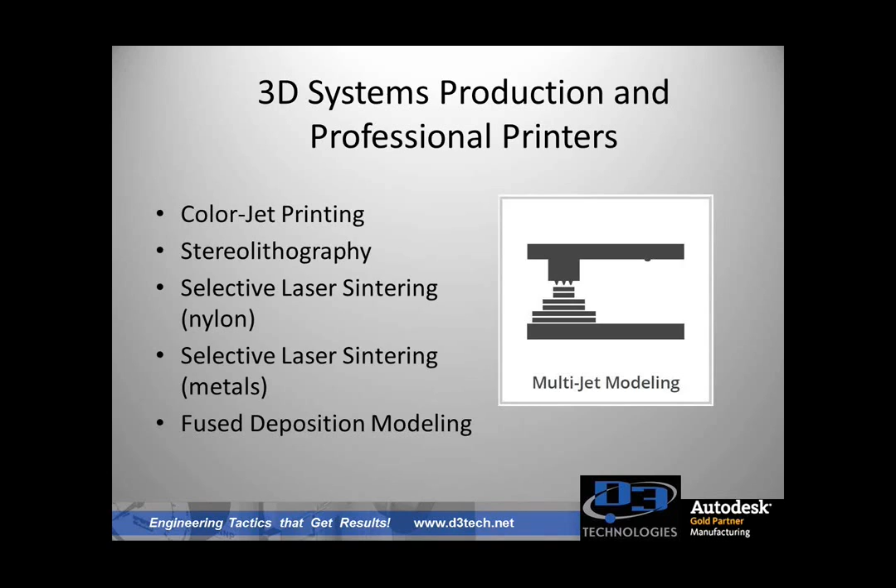We're going to discuss just one of the 3D print technologies from 3D Systems, which is multi-jet printing, and talk about some applications right for this technology. It's our intent to have these on a regular basis, so stay tuned for the next webinar where we'll be discussing stereolithography. As I mentioned, 3D Systems offers 7 different technologies for 3D printing, everything from color jet printing to selective laser sintering of metals and plastics. But today we're going to focus on multi-jet printing. I want to start by showing you a video of exactly how multi-jet printing works, and then we'll go into more details shortly.

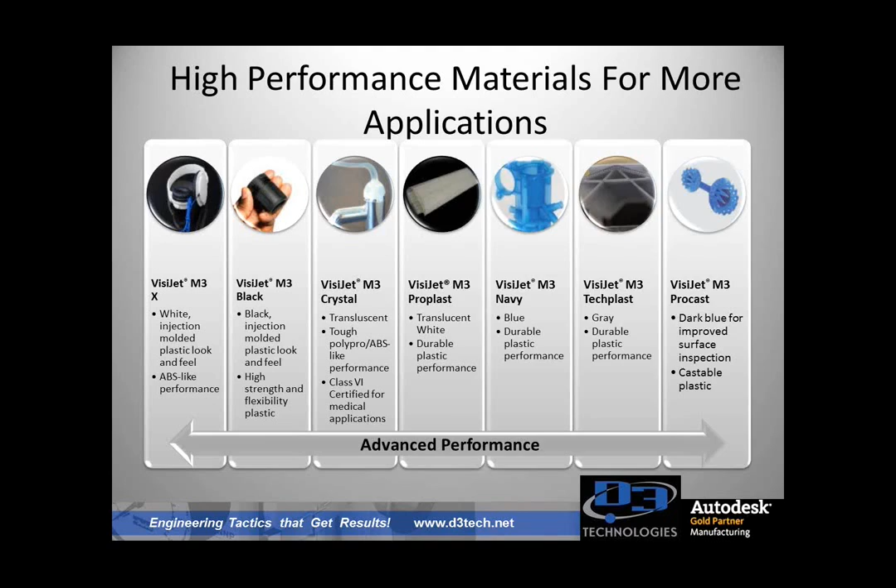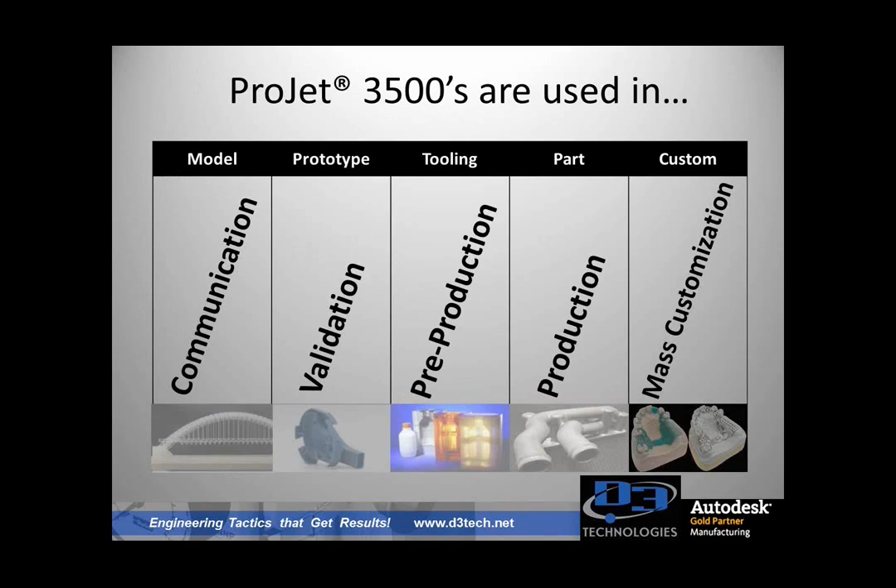As you might suspect, there are thousands of applications being used out there today in printing, but we can really condense it down to a few categories listed here. I want to talk about just a few examples of how the ProJet 3500 technology can be used in some of these options that are listed. So let's talk first about functional prototypes.

With the ProJet 3500, we can create functional prototypes. When I say that, I'm talking about testing form, testing fit, maybe assembly — you can get some great hands-on feedback, and do some great water testing. Why? Because this acrylate material is actually watertight and airtight, so it's not going to swell, leak, or change color if there's some sort of humidity in the air. So it's really a great product.

And I say that because if you take a look at the picture in the right-hand corner, that's an example of Lawler Valve. Lawler Valve actually brought this 3500 technology in because they wanted to test their valves with plastic, not with the real brass they had been using.

By doing that to recreate their valve body designs, they actually had a body weight reduction of 8 pounds of brass, a savings in shipping of over $95,000 a year, and a savings of over 24,000 pounds of brass per year. That was really significant by using the ProJet 3500 technology. The whole purpose is really just to help reduce costs of materials and assemblies with your designs.

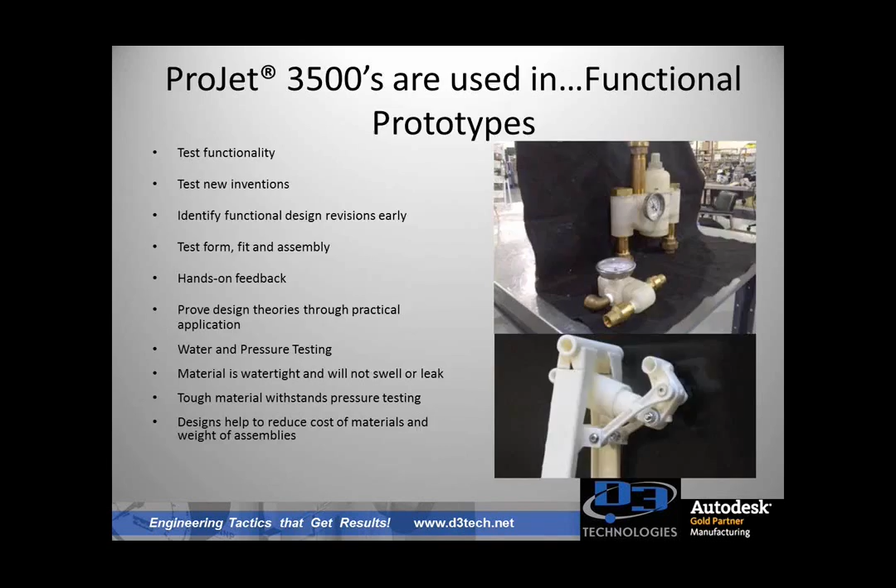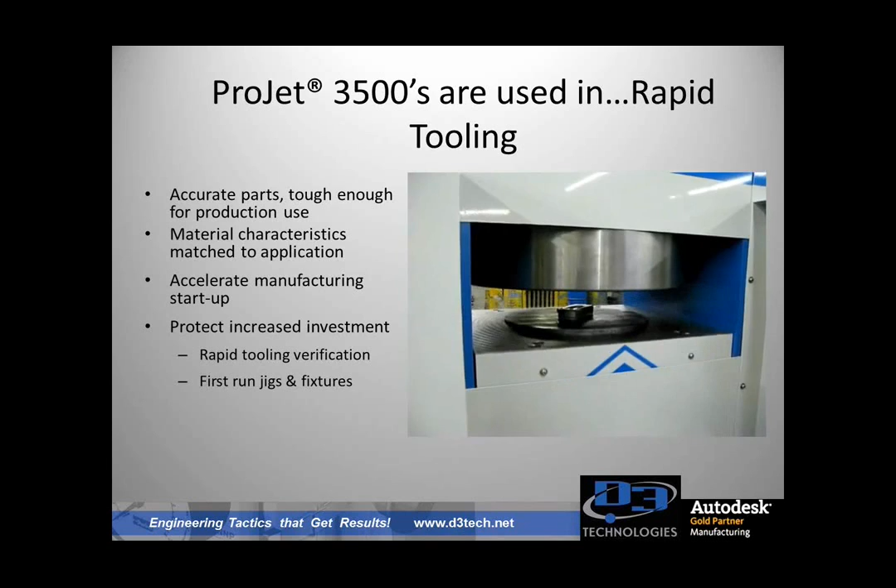So let's talk about another application. This is an example of rapid tooling. As you know, RTV molding is very popular, and it enables you to do low-volume molding of parts, so you can verify your whole manufacturing process before you start to commit to those really expensive tools.

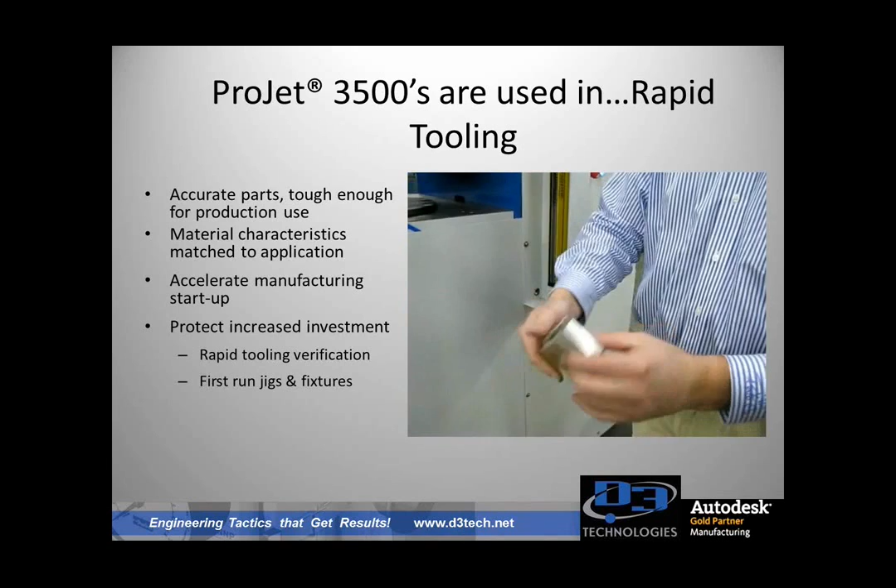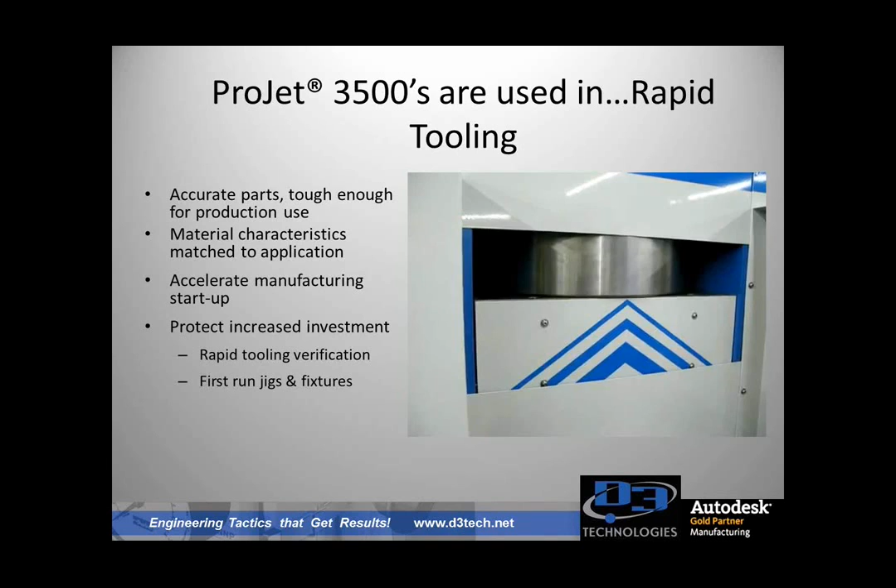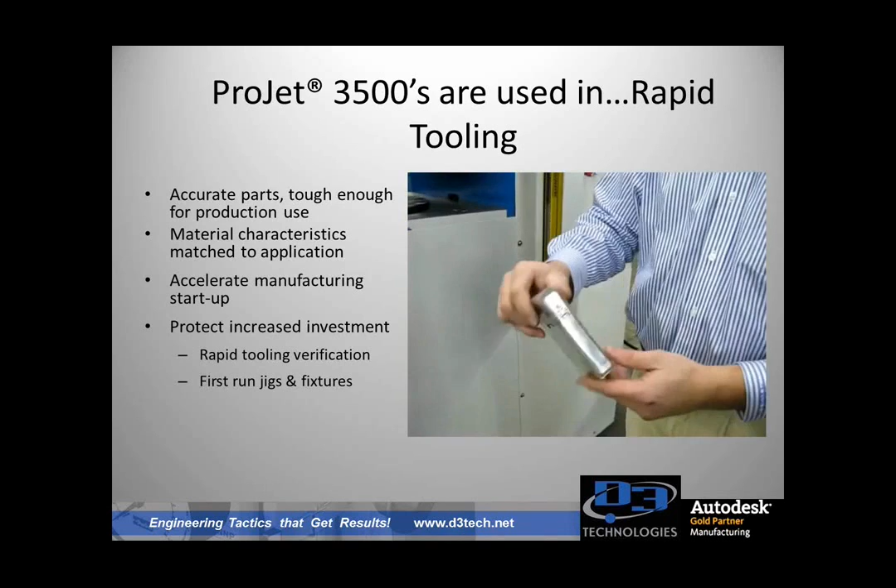This video shows you really just how tough a 3D printed tool can be. The mold you see here was 3D printed on a ProJet 3510 and is used to hydroform the sheet metal part. It can withstand up to about 5,000 psi of pressure on repeated runs. Again, a great application for RTV, for first run jigs and fixtures. It really helps to start up your whole manufacturing much faster by using this technology.

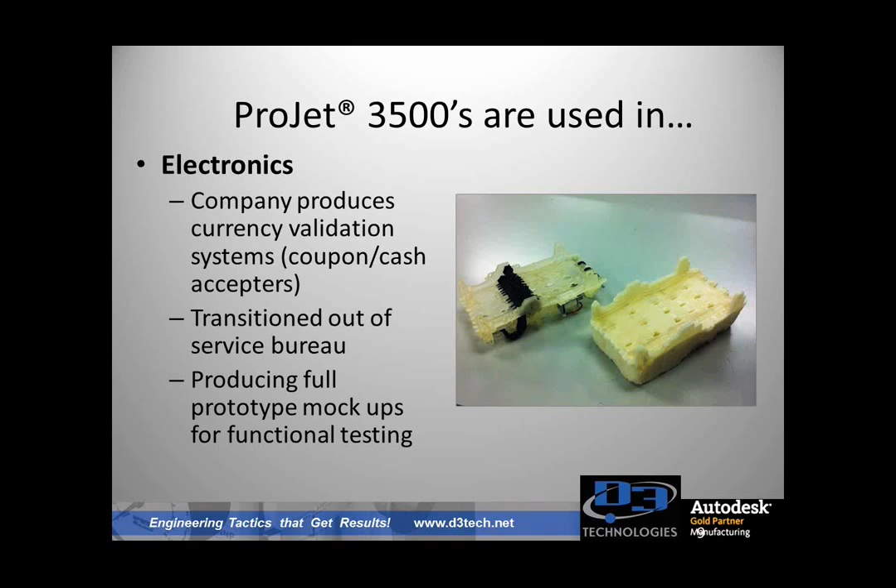Here's another example of a customer that produces currency validation systems, or coupon and cash acceptors. They're using the ProJet 3500 in the electronics field to produce prototypes or mock-ups and do functional testing within the machine. They decided to bring this in-house instead of using a service bureau, where they were able to save a lot of money and time doing quick validations.

They're also used in creating custom consumer products because of the fact that we're using a wax, so they can get that trapped wax capability that you can't get with some of the other technologies.

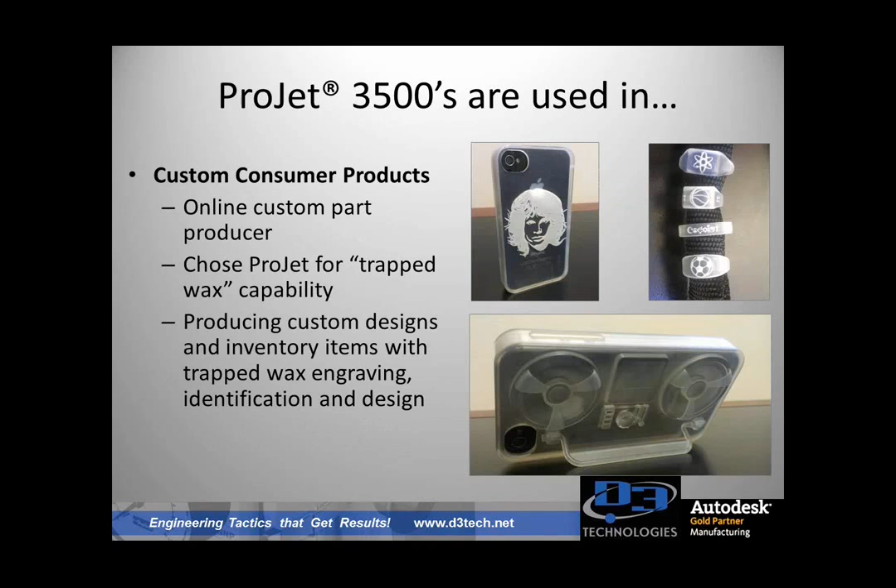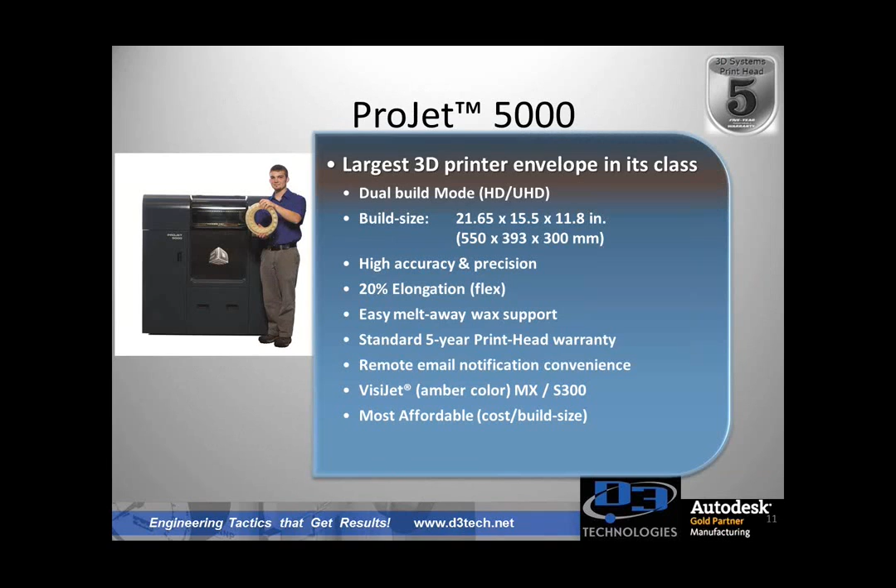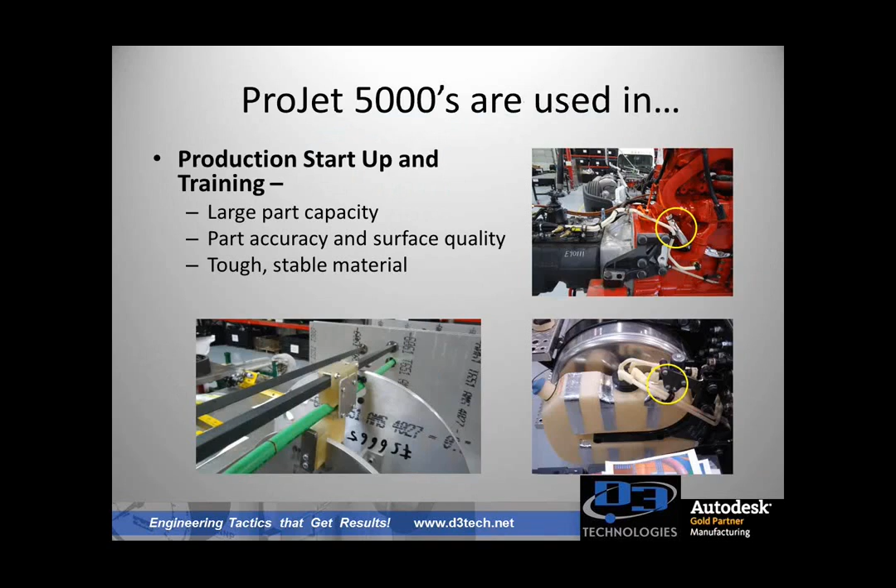I'm bringing up the ProJet 5000 because this is a big sister to the ProJet 3510. If you take a look at the build chamber size on this, which is about 21 by 15 by 12, this really allows you to do the very same thing you did with the ProJet 3510, has the very same process, but allows you to do much bigger parts, as you can see in some of these examples. So again, same accuracy and surface, but bigger parts.

As I mentioned previously, you can do some various finishing applications to these parts. I want to talk about a couple of those. The parts can be painted, they can be plated, they can even be drilled.

The other nice thing is even if your parts are too large to fit into the build chamber, you can slice your parts in CAD. I've had a lot of customers have success with that. They'll simply slice it in their CAD before they send it over, and then use a bonding agent of some sort, whether it's super glue or epoxy or something along that line. But in this case, before you paint, the biggest thing is make sure that you have good post-processing. You want to prime your products and use a high-quality paint application.

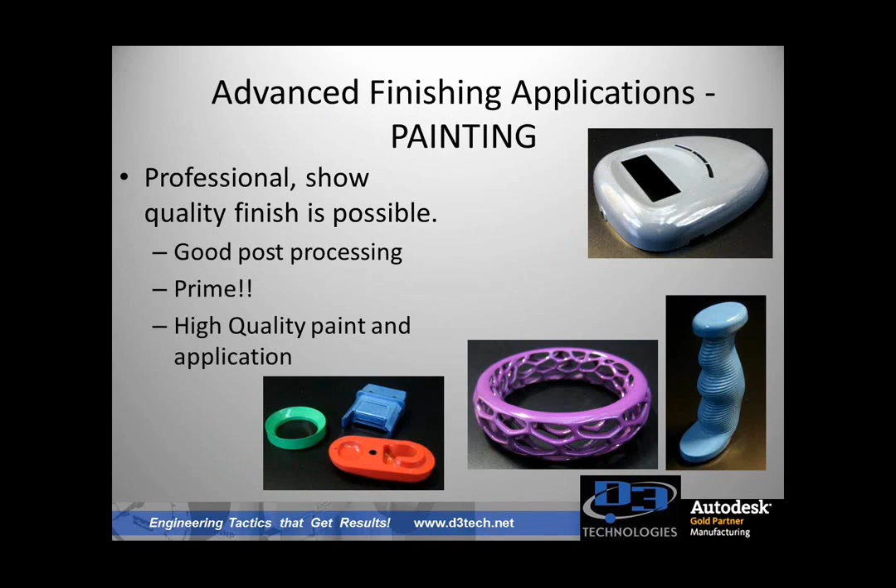Another great finishing application, kind of an advanced one, is being able to clear coat. Clear coat can really add a professional finish to it. If you remember one of the materials we talked about earlier, the VisiJet Crystal, which is actually this particular part right here, the almost clear one - apply a clear coat to that, which can be done with a spray can or a paint gun or something along that line, and you can almost get a transparent type part out of it.

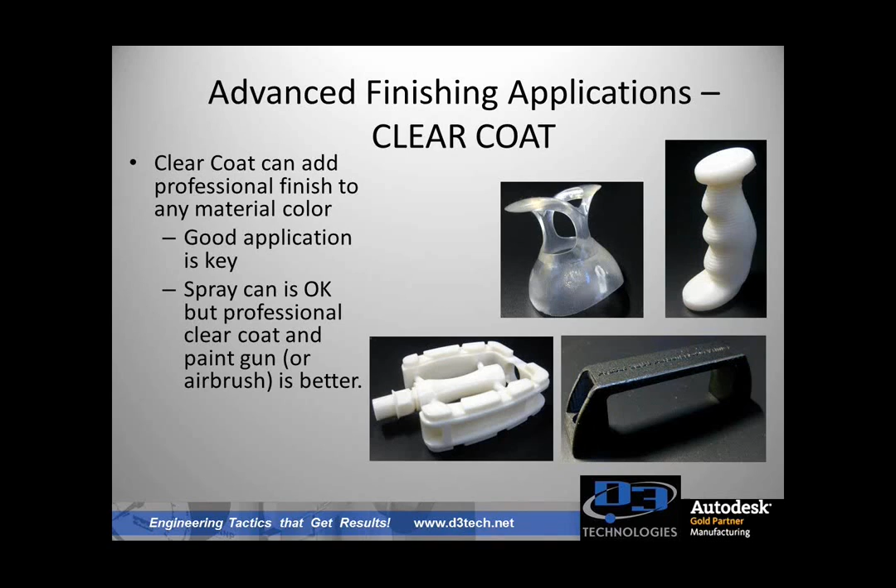I want to show you one more time a couple of other applications being done with the ProJet 3500 series, so you can get a good feel for what they're doing.

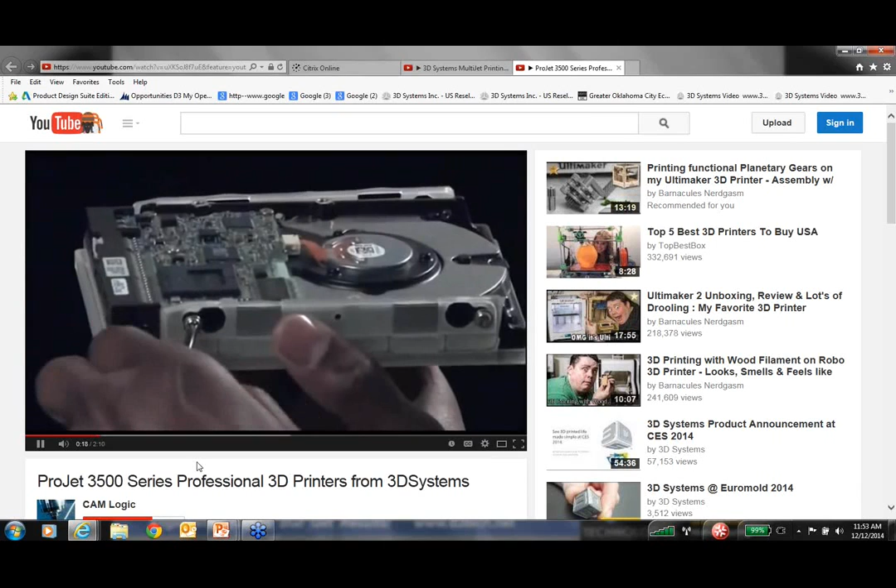What could you do with an in-house 3D printing solution? Accurate concept modeling, end-use manufacturing, functional prototyping right there in your own office. You can do it all with the ProJet 3500 series of 3D printers from 3D Systems.

The workhorse of the 3D Systems line, the ProJet 3500 provides precise, user-friendly, flexible 3D printing, a system that's tuned especially for professional-level production and office.

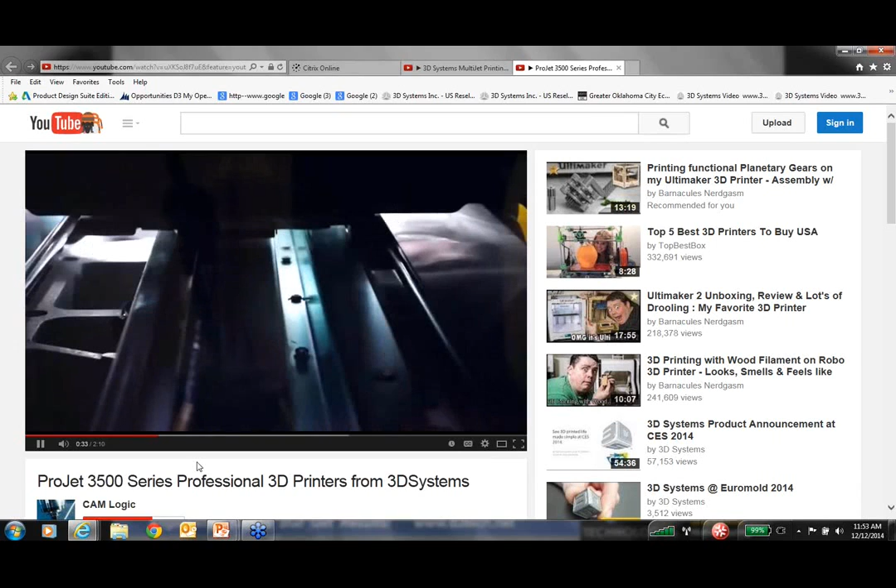With the ProJet 3500 series, I can print medical models, sharp edges, and intricate details. Prototype quickly and accurately. High output is not a problem with the ProJet 3500, so you can quickly print detailed design iterations, perfect the product, and address problems quickly.

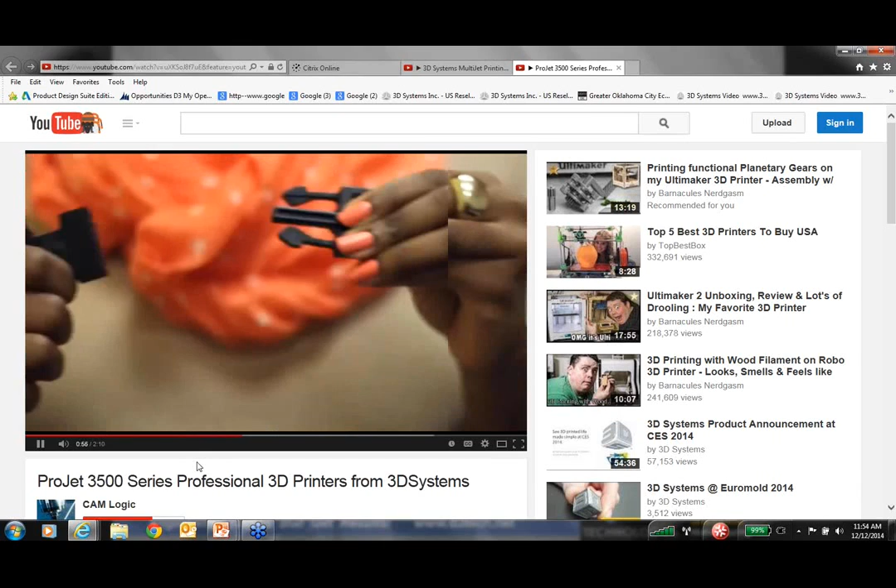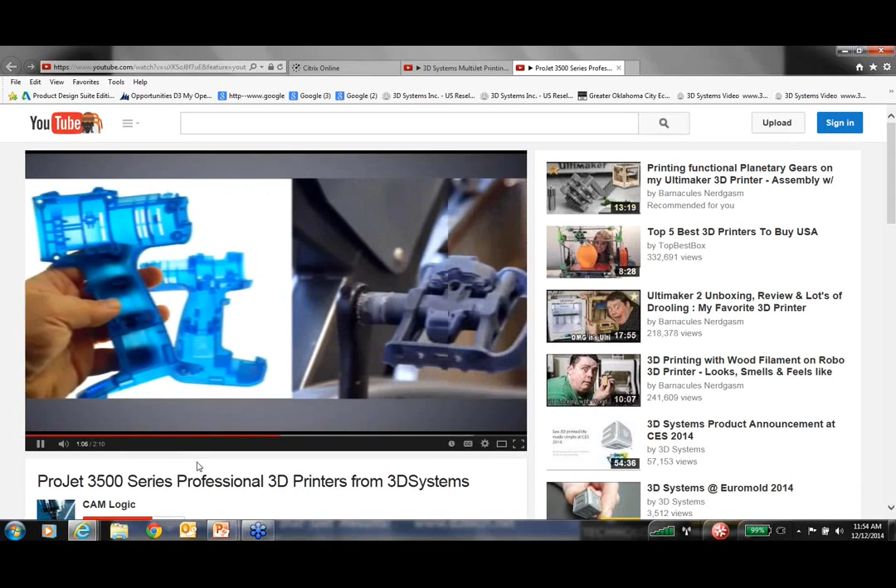With the ProJet 3500, I can create usable clips for my backpack design. Create functional parts - parts produced on the ProJet 3500 can be drilled, painted, and plated. Whatever it takes so that you can see your part move and interact with other components.

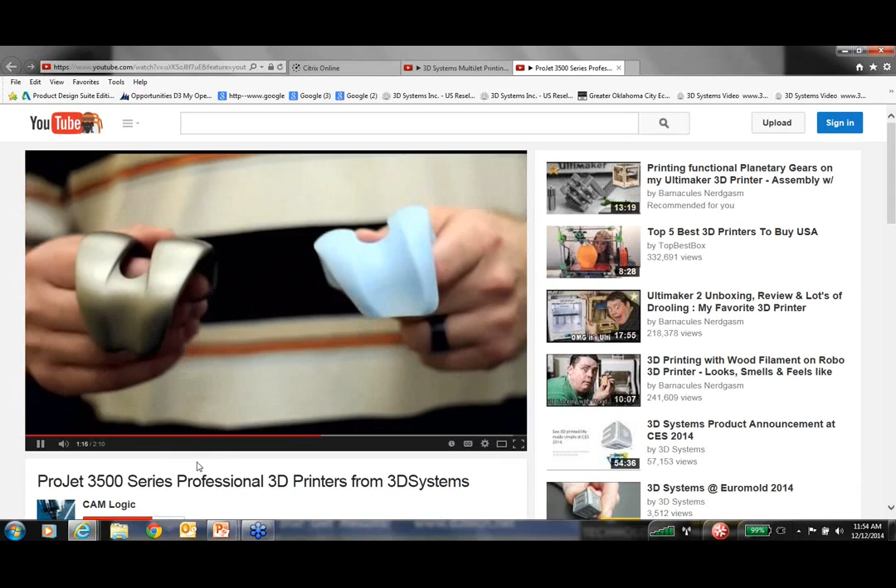The ProJet 3500 allows me to create production-ready, custom casting patterns for medical implants. Produce real wax patterns - the ProJet 3500 produces professional-grade wax patterns so you can streamline your process and go straight to direct investment casting.

Work seamlessly. An intuitive touchscreen interface and our Print 3D app for your tablet or smartphone means you spend more time on production and less time on instructions.

Enjoy reliability. The ProJet 3500 is the only 3D printer that saves you money with a 5-year printhead warranty.

So let me go through a few more details about how this whole process works. First, on your build plate, you're going to have a layer of wax, basically a paraffin wax initially. When you're getting ready to print, it's going to have about 264 print droplets from the print head. A molten drop of material is jetted from the print head, and the wax component below causes the drop to freeze upon contact, remaining in place until a UV ray cures it. So you're getting much better control and less waste.

The nice thing is you're taking one slice at a time, slicing your model and building from the bottom up. You don't have to worry about any printhead purging. Everything occurs automatically, and it's less expensive to build because your support material is wax, which is much lower cost than the actual material itself. The print time on this technology is about 2 hours per inch, and your cost is about $6 per cubic inch.

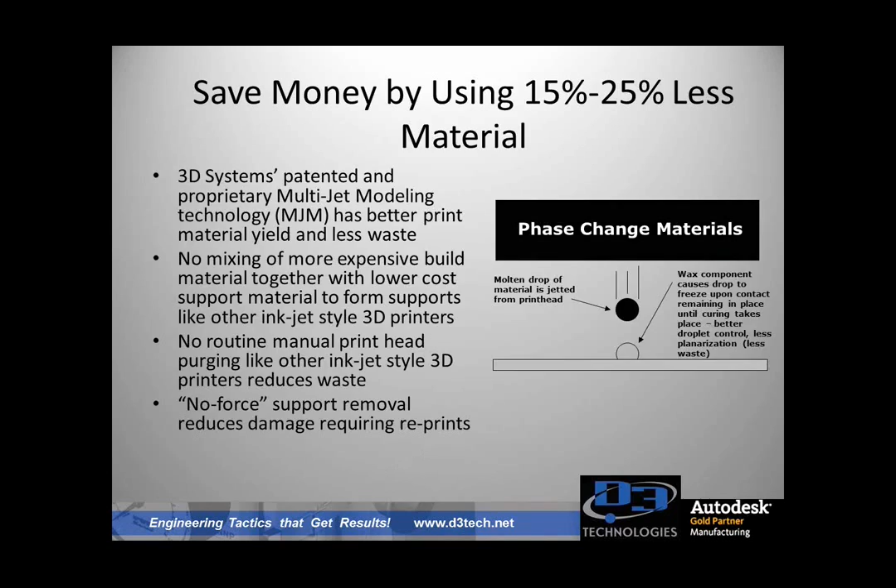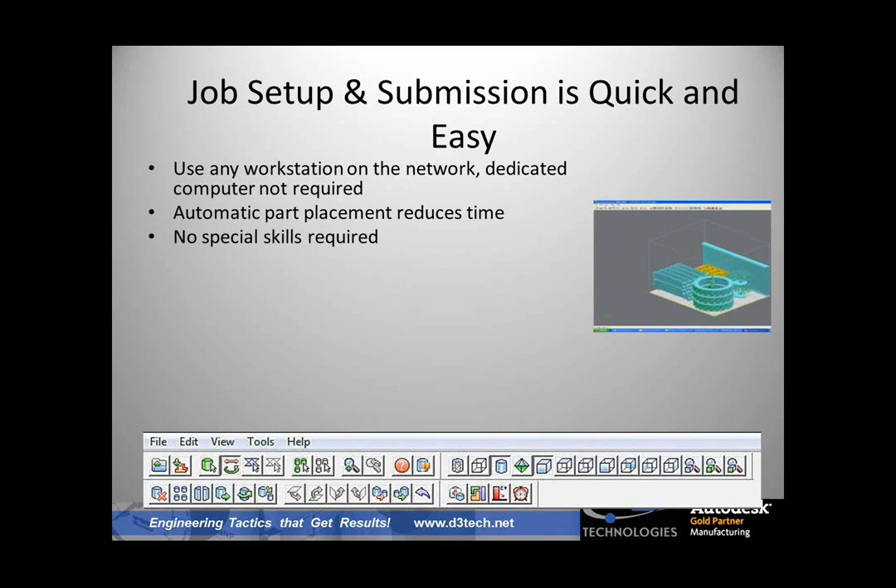So how does the job submit and setup work? Well, first of all, it's very easy. You can use it from any workstation, or you can dedicate a computer if you want to. The software automatically places the part, so you don't have to if you don't want to — there's really no special skills involved. Once you've submitted, you can go on about your way, shut down your workstation, or go do something else, so it doesn't tie up your workstation.

If you notice below, there's an icon toolbar with a lot of different file editing tools. So again, you've got a lot of capability there.

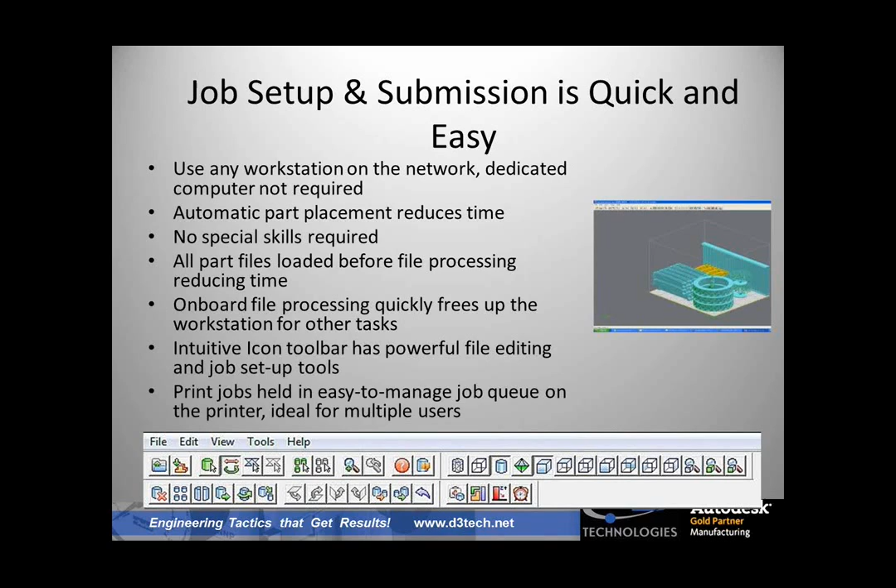The other thing I wanted to point out is that with this technology, it's great because you can nest parts. Even if you stack and nest parts, it's going to have a layer of wax in between. By being able to do that, you can stack shorter parts within taller parts to gain additional throughput, and it's not going to affect your build time at all — it's still the same amount of build time. That's the beauty of this.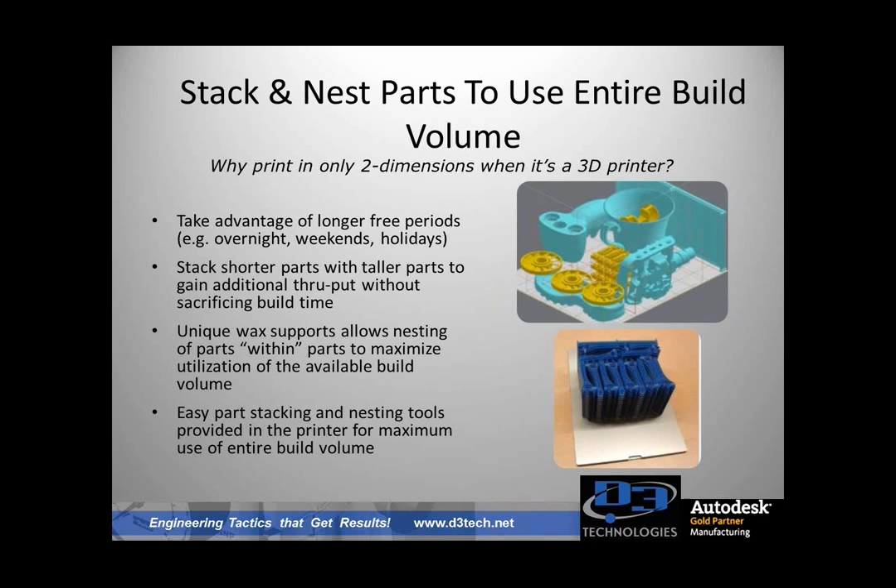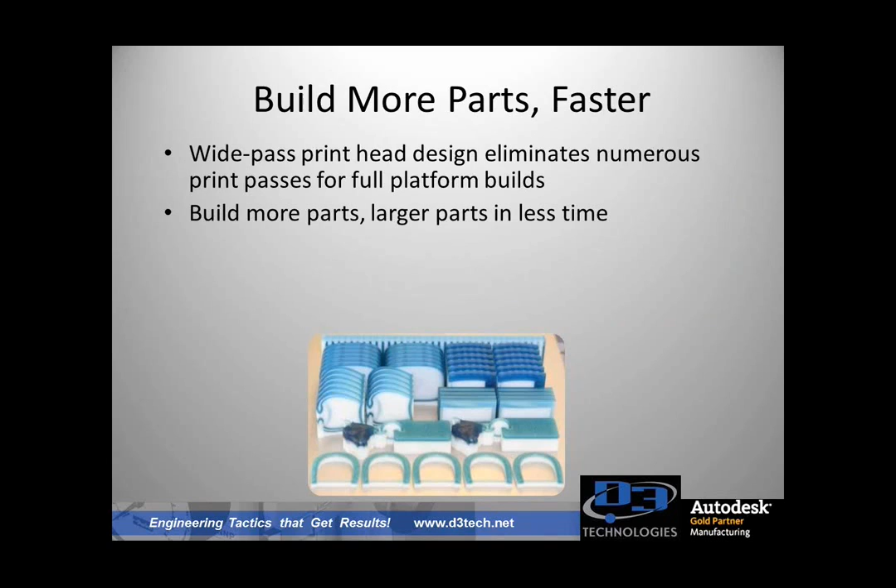The other thing I want to point out is that you've got a wide pass printhead design, which eliminates numerous print passes for your full platform as it's building. So you can build more parts and larger parts in a lot less time.

The other thing I want to talk about is easy connectivity. The beauty of this is your Print 3D app is available on either iPhone devices or Android tablet or smartphone, so you can really access the printer from anywhere — you don't have to access it straight from the 3D printer itself. That makes it much easier if you're off-site and want to manage your materials, or find out when the print's going to start or stop.

Also, you can find out how much material might be used during that actual print, and how long it's going to take. So you really get to see a lot of information and job history with this.

So really, the 3D printing is really just as easy as 1, 2, 3. It's a matter of removing the build platform with the parts on it, and you get 2 of them. You insert the clean build platform, press the start button, and start printing whatever you've got in your job queue. You export it out of your CAD as an STL, import it into the software that comes with the printer, orient your part, hit print, and you're ready to go.

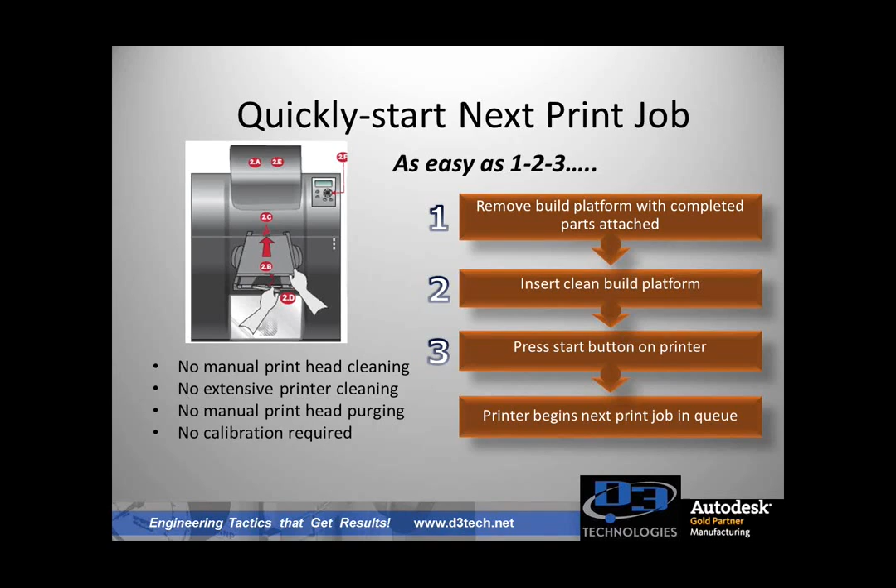I want to move on to the support removal process, and I think this is very key, something I really want to point out. As mentioned, it puts a layer of wax on the bottom before the part starts to be produced, and it will apply the wax where it needs support material applied.

But the beauty of this is that once you're done, you pull all your parts off that metal build plate, put them all into a finishing oven at about 60 C for 15 to 20 minutes, depending on the part itself. The beauty of that is that it's hands-free, you don't have to do anything. You put all your parts in there together, and it saves you a lot of time.

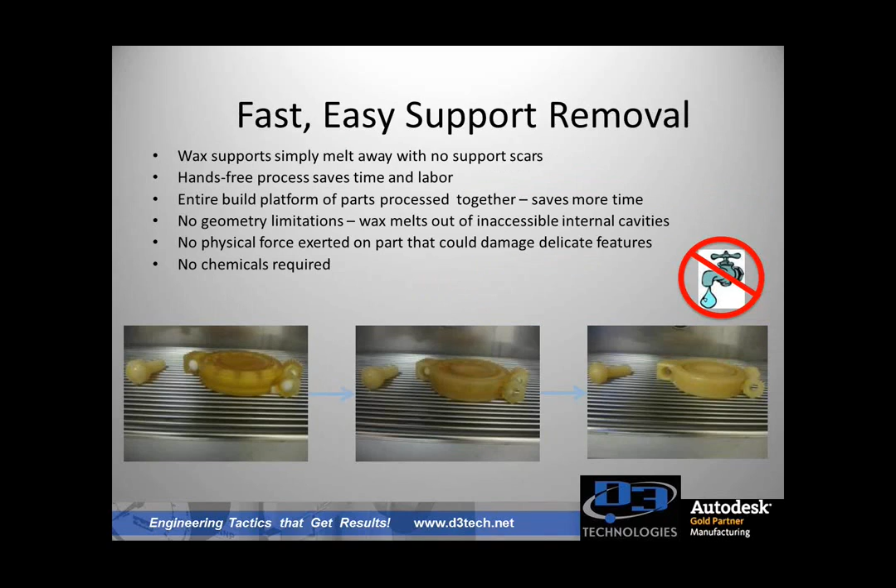The wax will melt out of those areas, and there's no force applied, no chemicals required for this. What some people do, if they've got really intricate parts, is sometimes use a cleaner, which removes the wax from the deep areas of geometry as well.

Again, the wax supports are inert, so there's no special disposal required. It will accumulate in a pan down below. Simply take that, melt it, throw it in the trash, and you're good. There's no fuss required because there's no plumbing.

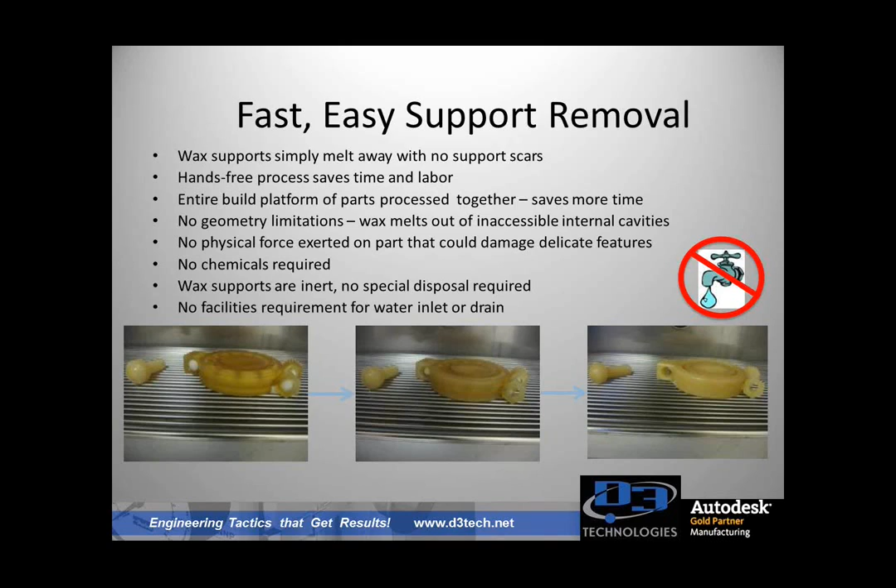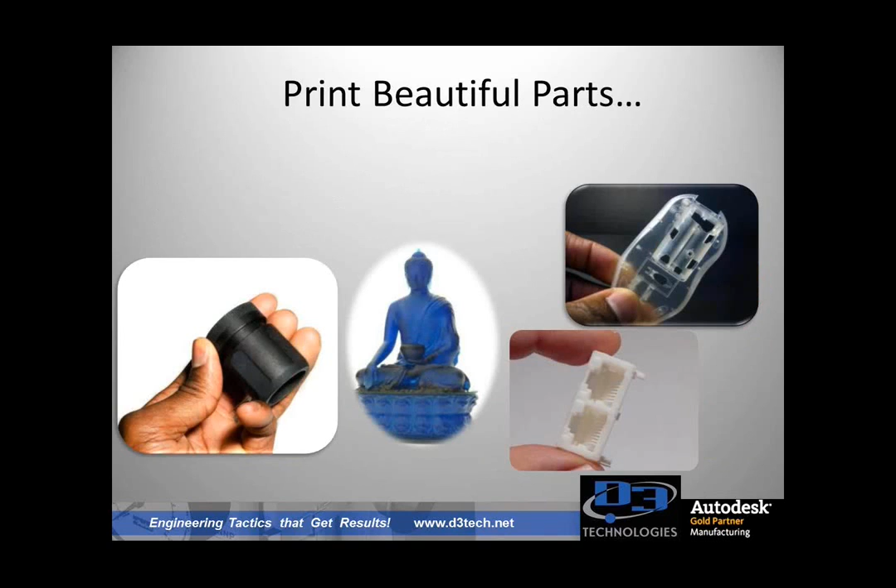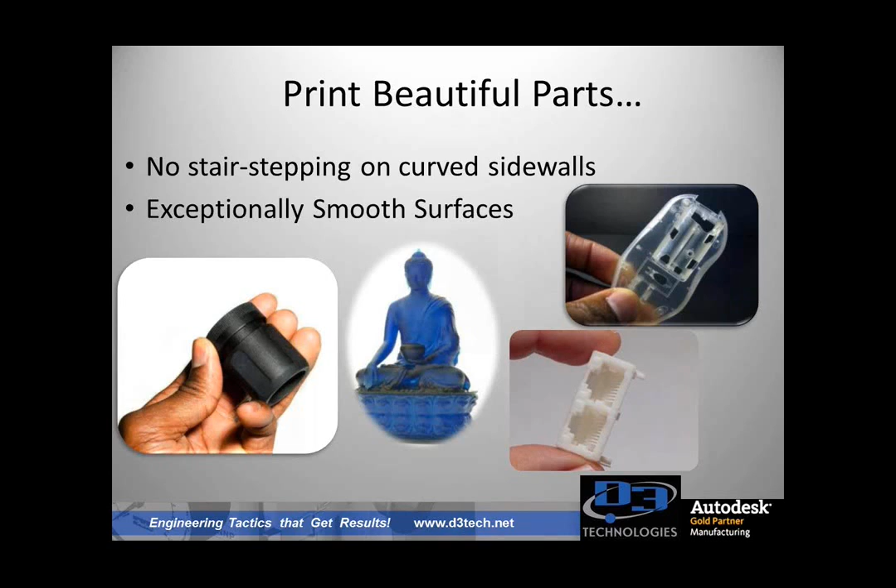So really what you're able to get out of this technology is, if you notice in the right-hand corner, that's the crystal material. You can also almost make it translucent with a clear coat, but you get fine detail, no support scars, no sanding, a paint-ready surface quality that actually looks like injection molded parts. There's no stair-stepping involved on this type of technique, and again, you get very fine detail, with tolerances from thousandths to two-thousandths, which is huge for this industry.

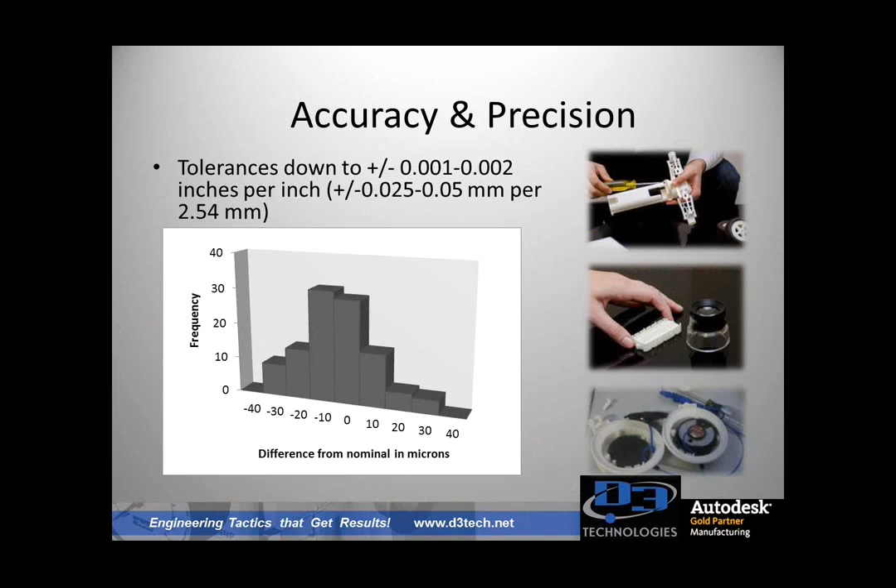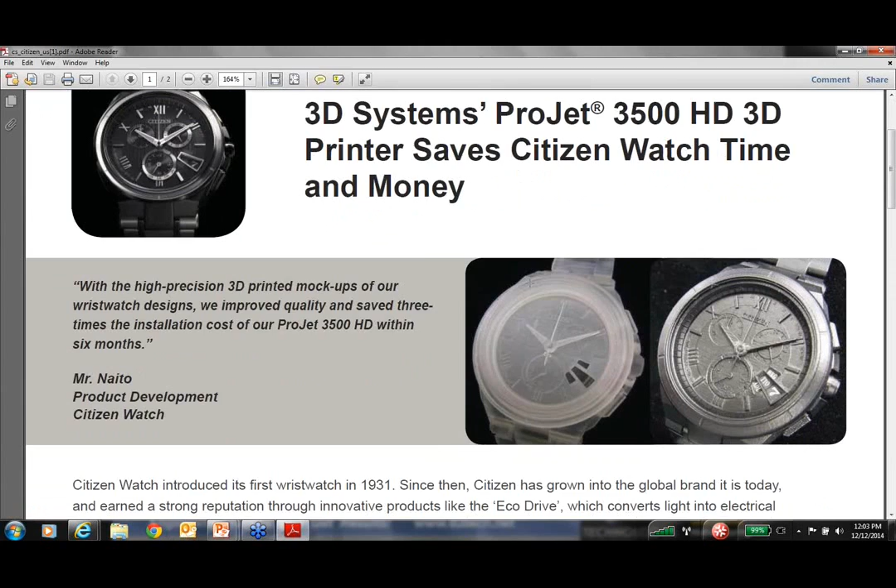I'd like to go through a case study real quickly. This is one example of a customer who was using this technology with the ProJet 3500. With high precision 3D printed mock-ups of their wristwatch designs, they were able to improve quality and save 3 times the installation cost of the ProJet 3500 within 6 months. In all honesty, that is huge in this industry.

To maintain their development strategy, Citizen relied on in-house prototyping. Before that, they used NC lathes in the machining center to create mock-ups for their final watch designs and assembly jigs, but that type of machining involves costs and time delays, as you know. So they decided to explore 3D printing to help reduce development time, and as I said, they were able to save a lot of money within 6 months.

They're using their ProJet 3500 to magnify and print tiny structural parts at 3 times their actual size, to examine movement and invent new assembly jigs. It really allowed them to transform about 20 to 30% of the process into overnight production, and now they've incorporated that into their workflow as a really powerful development tool.

So in summary, applications used for the ProJet 3500 are great for communication parts, great for form and fit testing, since they're airtight, and great for tooling applications as well. Hopefully that's giving you a little bit of insight into these parts and how they might be able to help you.